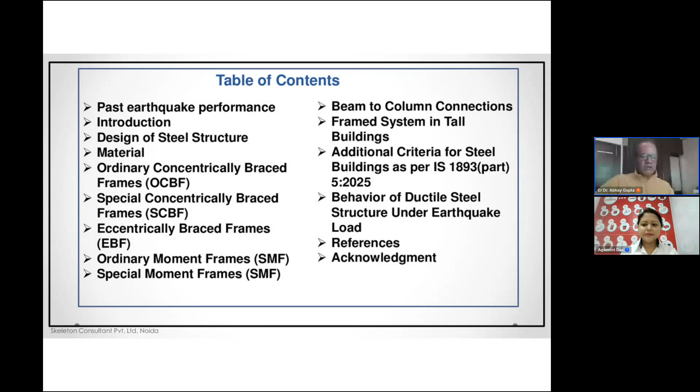This is important. We all know that seismic design means strength, stiffness, ductility, and structural configuration. These are the four virtues of a properly designed seismic structure for proper behavior and performance. I would remind you of a famous dialogue.

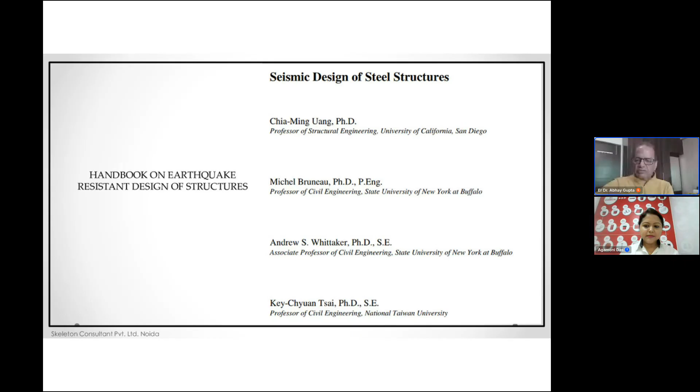This chapter says seismic design of steel building structures has undergone significant changes since the Northridge, California earthquake in 1994. Earthquake is a phenomenon not 100% properly known. So whenever there is an earthquake and damage occurs to buildings and structures, we intend to improve the practice. That is a lesson learned from the failure or lesson learned from the behavior, which is a very good practice for improvement in earthquake resistant design and detailing.

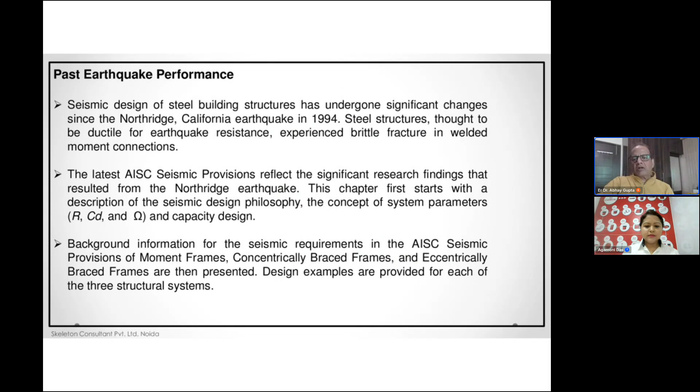So the 1994 Northridge earthquake caused several damages, leading to a lot of changes in philosophy. These are narrated point wise, particularly braced frames moving from concentric to eccentric braced frames. Connection design was earlier thought to be ductile, that steel would not undergo brittle failure, but connections underwent failures. There have been significant changes in the connection design and detailing of steel structures post the Northridge earthquake of 1994.

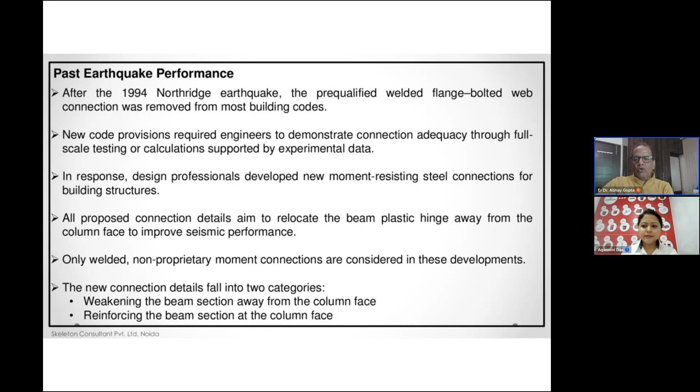In the American code, AISC documents have been published describing new connection details. As stated, the new connection details fall into two categories: weakening the beam section away from the column face so that plastic hinging occurs there, and reinforcing the beam section at the column face so that the connection doesn't fail. These were the fundamental principles.

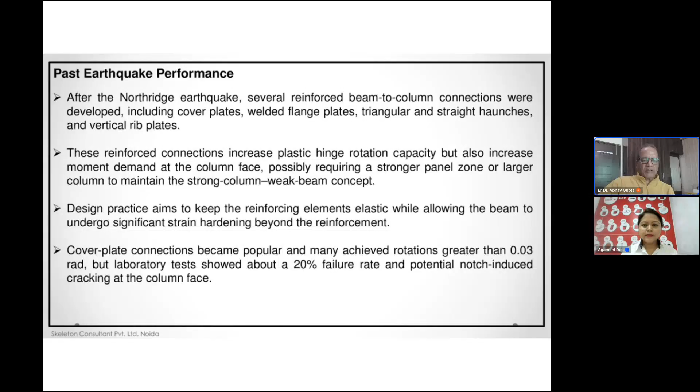Several reinforced beam-column connections were developed, and I'll show you all these details. This is also what IS 18168 emphasizes. Now, this is a summary from past earthquake performance and how things were taken up.

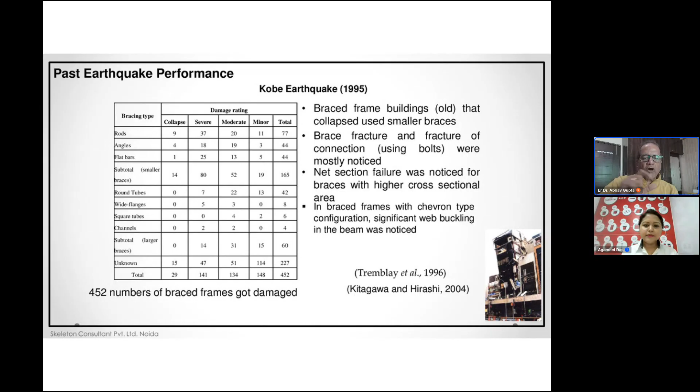These are from the Kobe earthquake of 1995. What damages happened in what kinds of structures? There were bracings of different types: rods, angles, flat bars, and so on. Statistical data was collected on how many structures underwent collapse, severe damage, or moderate damage, and it was observed that small, slender bracings underwent more damage.

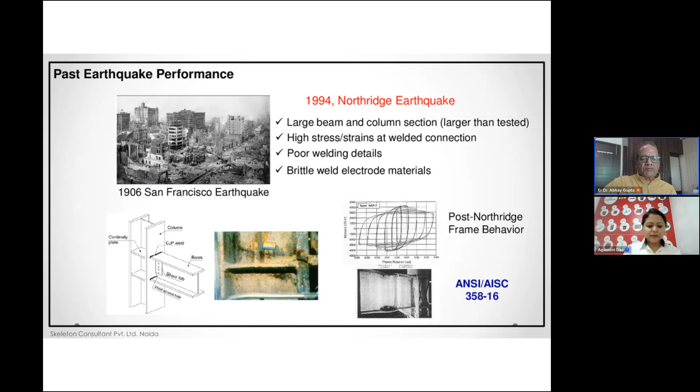These are some images from those damages, picked from literature and from fellow colleagues, covering the San Francisco earthquake, Northridge earthquake, and damage to connections. You can see local failure and local buckling here. Pre-Northridge welded flange and bolted connections were like this, where yielding and failure occurred just at the junction.

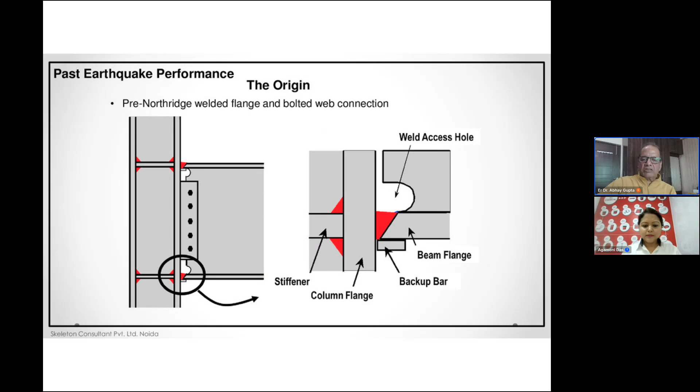Some more of this type: welded flange and bolted web connections, where again damages occurred, and you can see cracking happening there. Though the member itself was safe, connections failed like this. These are some of the sketches.

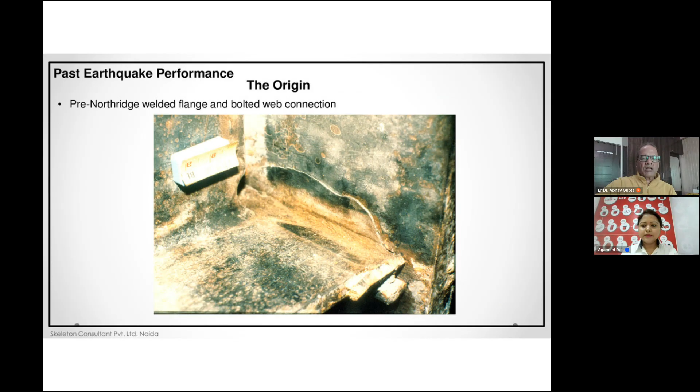These are some actual pictures of the damages in that earthquake. More images and pictures - I'm going a bit fast because these are just historical things, and since you'll receive this presentation, I will ask the Hilti team to share it with all participants. So what was the reason for the failure?

Mostly welding, connection design, and materials were the issues - low fracture toughness in the welded connection, poor quality of workmanship, which certainly is much improved nowadays, and the effect of backing.

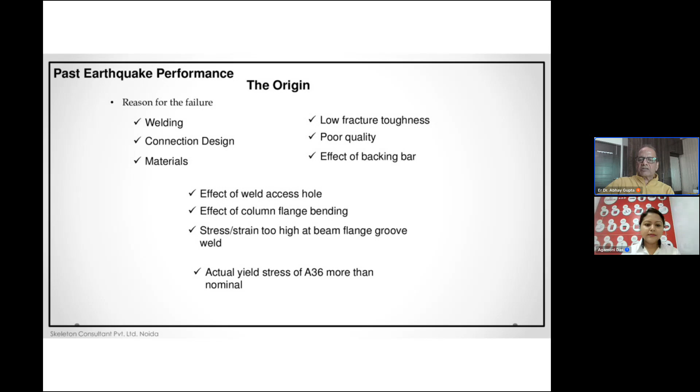Effect of weld access hole - there was a weld access hole typically made so that welding could be done, and that has some adverse effects on the performance of the connections. That is also very, very important.

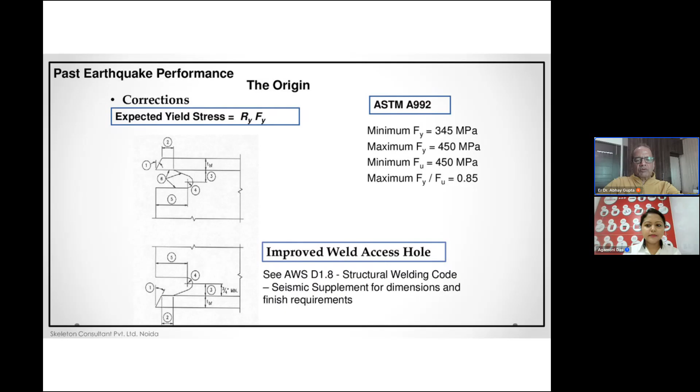Connections as per ASTM A992 specified material strength, and the improved weld access hole was then made. These are some of the improved connections - reduction in the section, development of the improved section, and reinforced, stiffened connections.

This is important - this is the one suggested where the flange is narrowed a bit away from the column face so that plastic hinging occurs there.

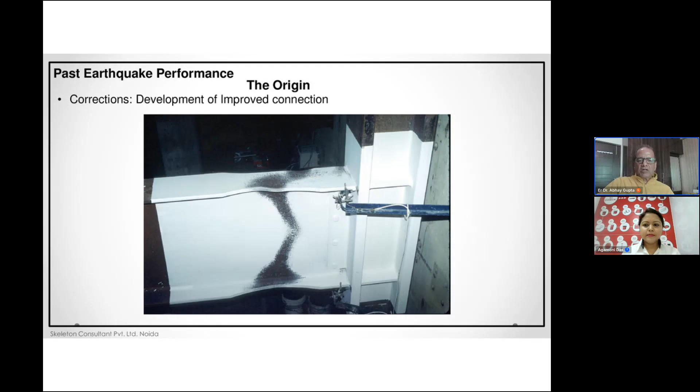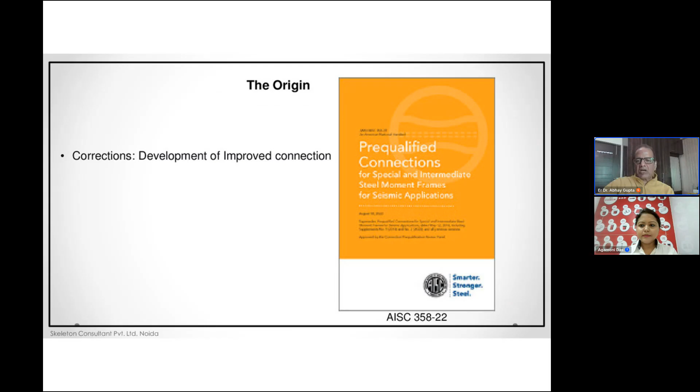This document is very important. Whatever I have spoken is all compiled here in the pre-qualified connections. Pre-qualified means certain qualification parameters for connections were decided, and some connections have been properly detailed and designed, compiled into document 358-22 of AISC. You must all have this document - they're freely downloadable from the AISC site, and we can share them for educational purposes, no issue.

And in Northridge '94, large beam and column sections were there, with high stress-strain at the welded connection which led to poor welded details, and brittle weld electrode material. This was another important parameter - the material of the electrode.

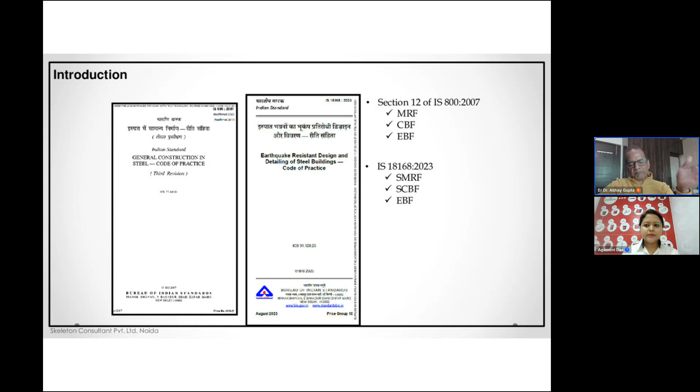So all these have been taken care of in our two new codes, IS 800 and IS 18168. IS 800 chapter 12, section 12 had MRF, CBF and EBF - moment resisting frame, concentric braced frame, and eccentric braced frame - which are converted or advanced into 18168 as special moment resisting frame, special concentric braced frame, and eccentric braced frame. In terms of hierarchy, performance-wise, EBFs are the best, SCBF after that, and SMRF the lowest, in terms of ductility performance of the structure.

In these codes, particularly 18168, these are applicable to all buildings located in seismic zone 3, 4, 5. Now this has to be updated in light of IS 1893 Part 1, the new 2025 version, and Part 5. The zone numbers will change. This 18168 is a bit old, from 2023.

So this will be updated and most probably published as IS 13920 Part 5B. IS 13920 Part 5A would be ductile detailing of RCC structures, whereas this would be Part B for steel buildings. So these code zone numbers would change, meaning in the higher seismic zones, for all buildings this is compulsory - residential, educational and others. Use of this code is optional for design in zone 2, the moderate zone.

In zone 5, only the EBF system. As I said, performance-wise EBFs are better. EBFs are best in energy dissipation - they provide a proper flexible link in the structure, so a sway is there. While concentric braced frames or special concentric braced frames impart strength and stiffness, so they allow lesser lateral sway. So there is a compromise between the two. However, in high earthquake zones, EBFs perform better in terms of energy dissipation.

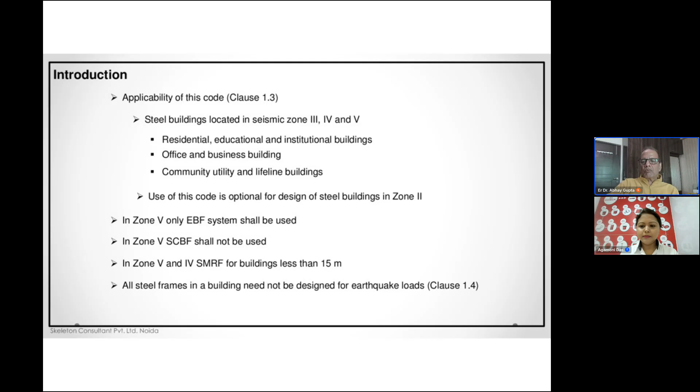Correct, so more qualifying statements are there. The capacity design has been emphasized.

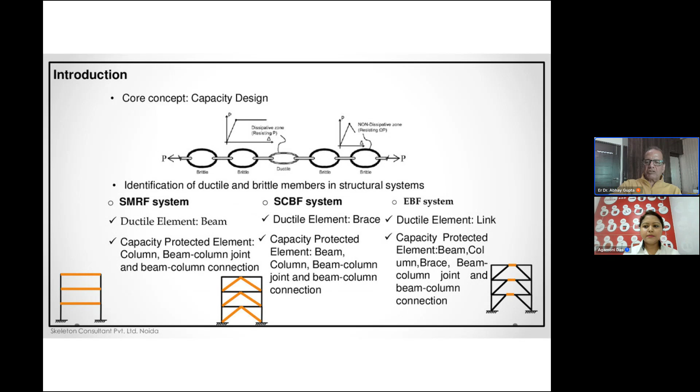This capacity design concept says you should identify ductile and brittle members in a structural system. You need not design the entire structure, every element, for ductility. You can identify which link is allowed to fail, so that the user or agency is aware of where the vulnerability is. So in SMRF systems, which are the ductile elements, and in SCBF and EBF systems, which elements should be protected and which can be allowed to undergo ductility - that is defined based on the capacity concept. This should be understood well and followed.

Many regions of India are prone to strong earthquake shaking. Now it's almost 65-70%, actually 70 plus as per the new map. So we need to take care of proper detailing. The only thing is the last statement, which is important.

Provisions of this standard shall govern when in conflict with those in Section 12 of IS 800:2007, because Section 12 of 800:2007 will still remain there. So the provisions of 18168, or the updated 13920 Part 5B, would govern in case of any conflict between the two. When you go through the course, you must understand these qualifying statements - very important.

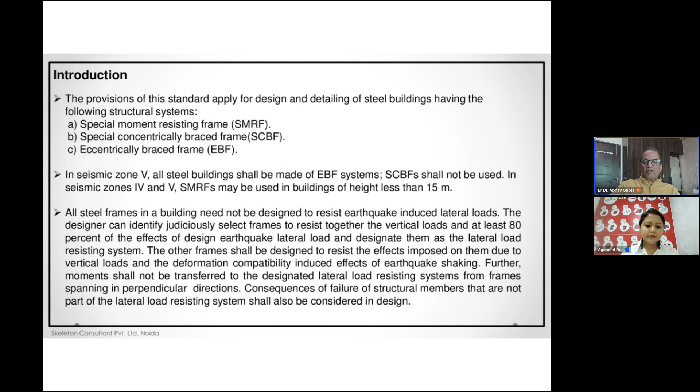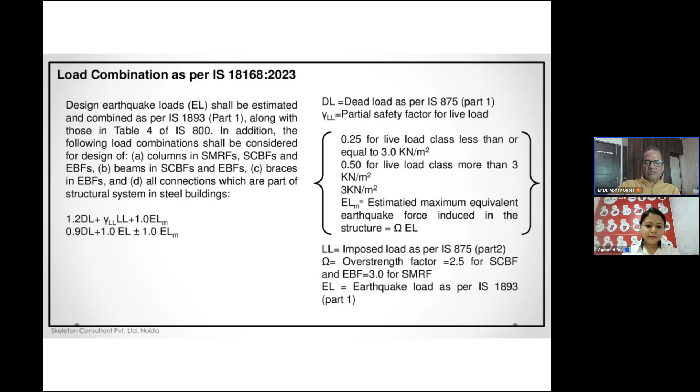Load combinations - there is an additional overstrength factor which has been added, in addition to the partial safety factor for live load, and on the earthquake there is an overstrength factor too. Now overstrength is something beyond your calculated values - there is overstrength available in the structure. Having overstrength is not very good from the perspective of seismic performance, because then the anticipated ductile behavior doesn't reach that particular point. And when you go to the capacity concept, the other elements have to be designed for a larger capacity than that. So the code has incorporated this overstrength factor for different structural systems in the design to be considered.

Load combinations - 18168 says use Table 4 of IS 800. So that has been reproduced here. Simple - in different load combinations, what load factors are to be taken. Same thing, this is also referred from Table 4 of IS 800.

Material strength uncertainty factor - yes, this is given there in the code. Those of you who are aware and have gone through it will be able to answer it very quickly. Please attempt this question.

There are three things in the code which have been emphasized. One is the material and the section. Second is the structural system, which is important. And third is about the connection detail. These are the three important things from the performance perspective.

For material, IS 2062 is the code referred, where structural steel sections and plates of grade E250 to E350 are recommended for use. Any other equivalent grade of steel satisfying the following can be used. There may be a question in mind - what about grade 450? Actually, 450 grade is a high strength grade. It can be used only for those elements which are not supposed to be ductile during earthquake performance.

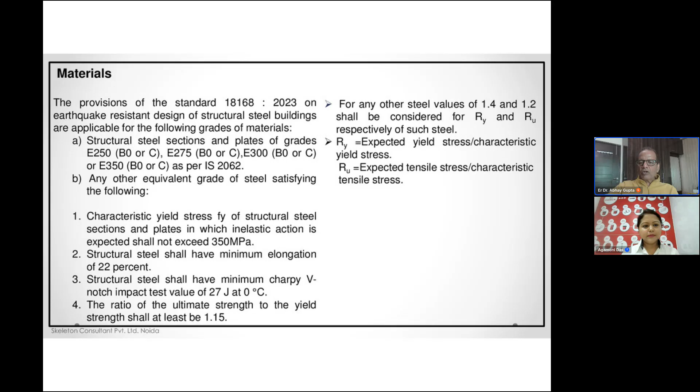You can decide that some of the elements you choose to be ductile. For those elements which will govern the seismic behavior, it is better to use a 350 grade because it is a proper balance between strength, stiffness, and ductility. 450 is for those where strength is important but not ductility, so non-seismic or non-fusing elements can use 450.

This is the material uncertainty factor, material strength uncertainty factor, which is always more than 1.

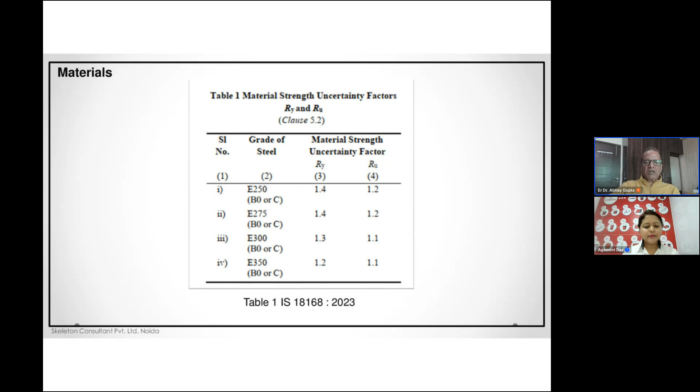Bracing members shall be made of E250B steel from table 2, because they will undergo larger deformations. So it is recommended like that.

Below is given the stress strain curve of 350 and 450, more or less behaving the same, except 450 is a little higher on the stresses side for the same strain.

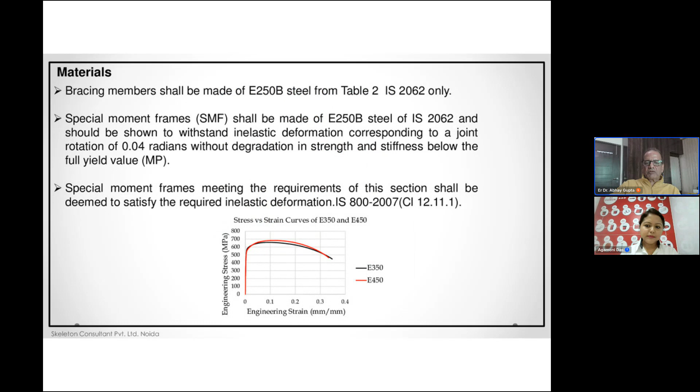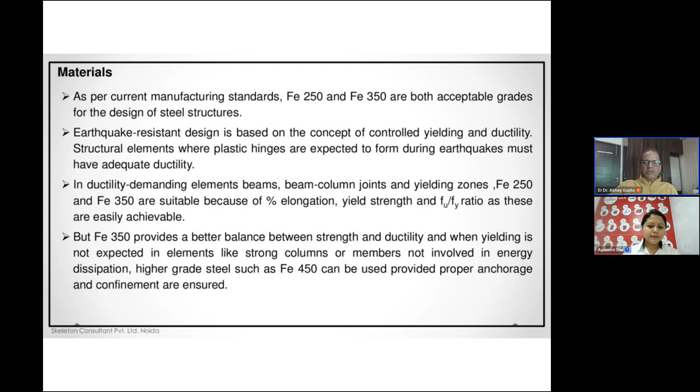As per current manufacturing standard, 250 and 350 both are acceptable, and otherwise some more higher grade steel such as 450 can be used provided proper anchorage and confinement are ensured. In two different cases, using the higher grade and the lower grade, how the structure will behave and how the plastic hinging will be there is shown here.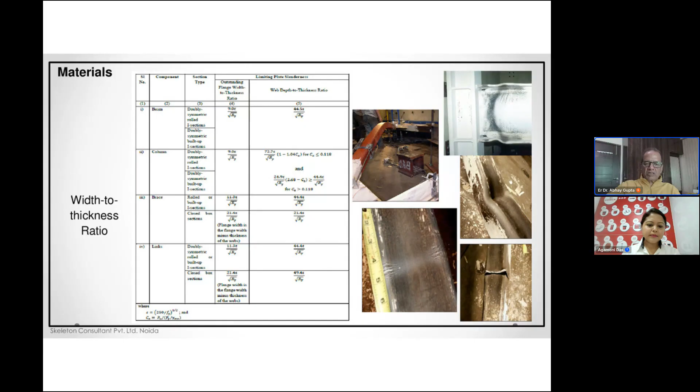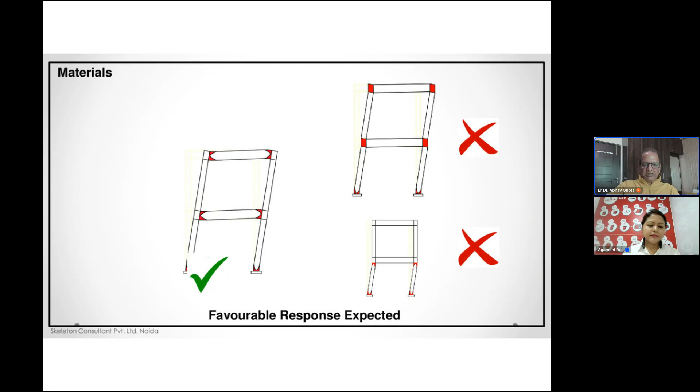Width to thickness ratio for different elements - beam, columns, braces, and links - what should be followed so that you do not get these kinds of issues, are given here in this table. I'm not going into those details. The desirable and undesirable performance, where the plastic hinging should happen and where it should be avoided, is shown here.

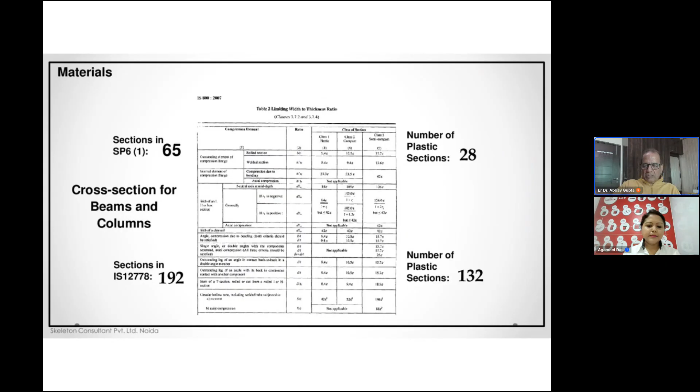There are two documents: one is SP6 part 1 and one is IS 12778, where steel sections are given. There are 65 sections in SP6, whereas 192 in 12778, out of which 28 plastic sections are there in SP6 part 1 and 132 in this one. So this is just a statistical analysis of the data.

Eccentricities less than the beam depth are permitted if the resulting member and connection forces are addressed in the design as per clause 12.2.1.

If you look at this clause, some protected members are shown, that the required strength of capacity protected elements like columns, beams, struts, collectors, and connections shall be taken as the larger force determined from the following analysis. These protected zones I'll show you in a diagram a bit later on.

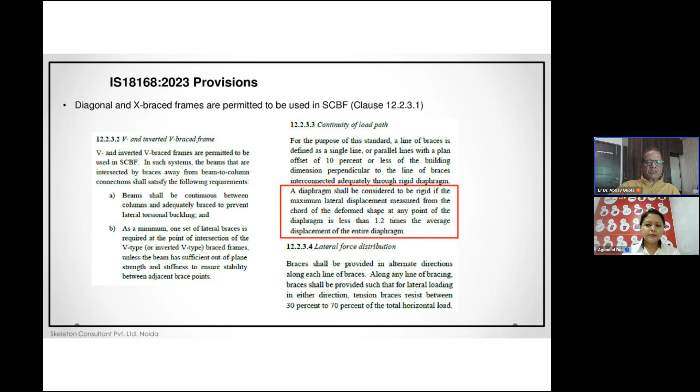A rigid diaphragm shall be considered rigid if the maximum lateral displacement measured from the chord of the deformed shape - it is just the lateral movement. So how that will be considered as rigid, you have to take care of, and then you follow this.

K-braced frames shall not be used in SCBF, special concentric braced frames. You can only use the diagonal, the cross, and the V configurations.

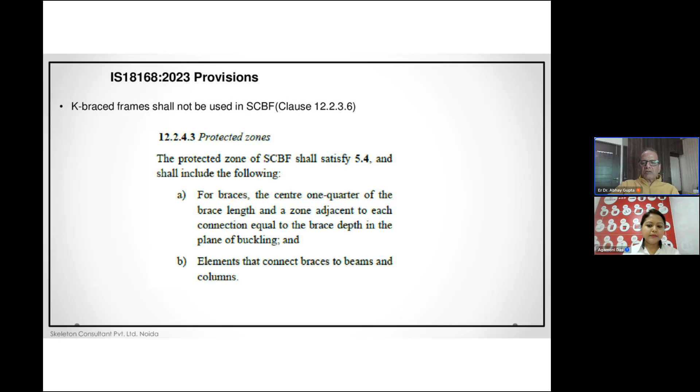The protected zone shall satisfy clause 5.4 like this. For the braces, the center one-fourth of the brace length has provisions about where it should be and where it should not, which zone should be protected.

Links shall not be connected to the columns. This focuses on ensuring performance during severe earthquake shaking - this is a good question. So there are certain requirements laid down in IS 18168 for different kinds of sections for the performance.

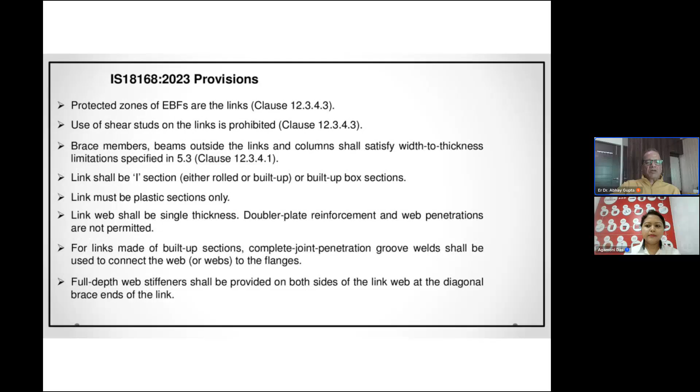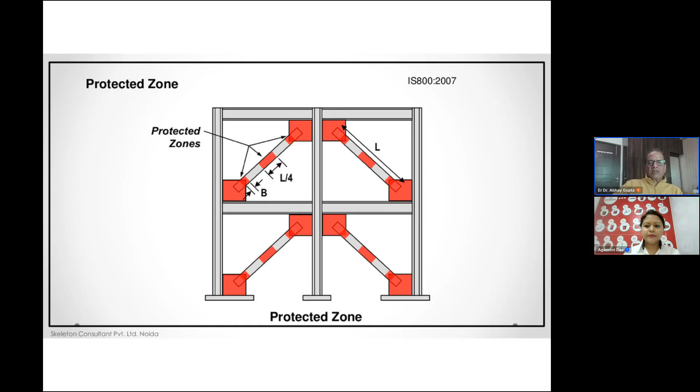All these protected zones of EBFs are the links - they should be protected. Use of shear studs on the link is prohibited. Brace members and beams outside the links and columns shall satisfy width to thickness criteria, so these should be followed. These are the protected zones which should follow those criteria - they should not yield or fail. That is the protected zone specified.

Some more provisions going ahead - this is very nicely narrated in IS 18168, and going through that, if you make your checklist, life will become very easy as far as steel design and detailing is concerned.

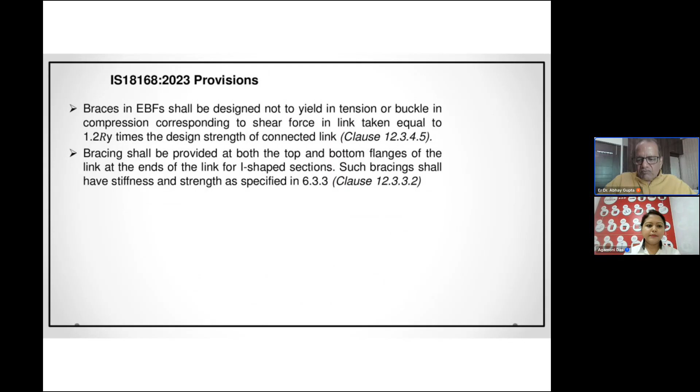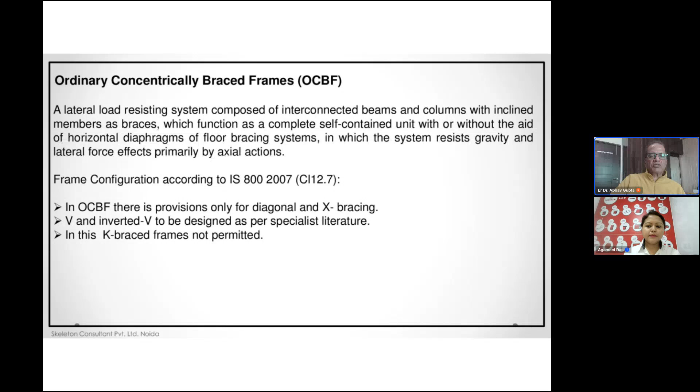Some of the bracing systems using OCBF are there, with actual images showing how they look and how they are done, and design of bracing members as per IS 800 Clause 12.7.2 are given.

The slenderness ratio and rotation along any line of bracing - braces shall be provided such that for lateral loading in either direction, the tension braces will have to resist between 30 to 70% of the total lateral load, not beyond that.

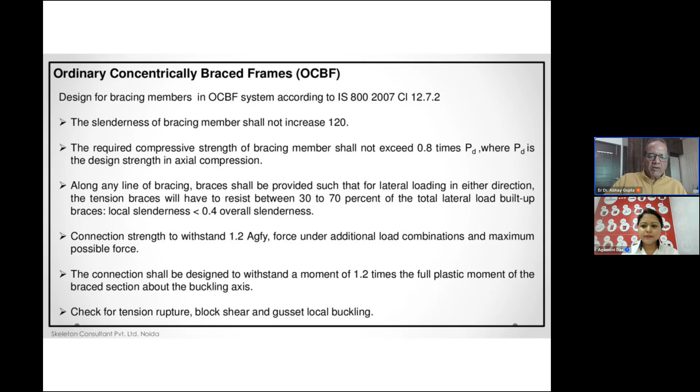So these are the points which should be taken care of, and IS 1893 has picked this up from past experiences and done it very nicely.

In buildings like Hancock Center, Chicago, or some warehouses, concentric braced frames can be approximately modeled as vertical trusses. You can always do that and analyze them.

Like this tower also. Initially, braced frames were used for their high strength and stiffness. These OCBFs are high strength, high stiffness elements.

Seismic provisions were introduced late in the USA. In India, now we are picking up and emphasizing on them.

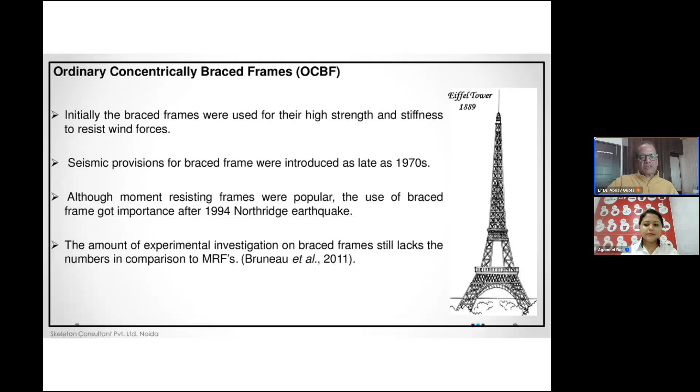Although moment resisting frames were popular, the use of braced frames got importance after '94. Till then, they were thinking moment resisting frames are good, and most buildings were like that, but they suffered severe damages. So then they switched over to braced systems.

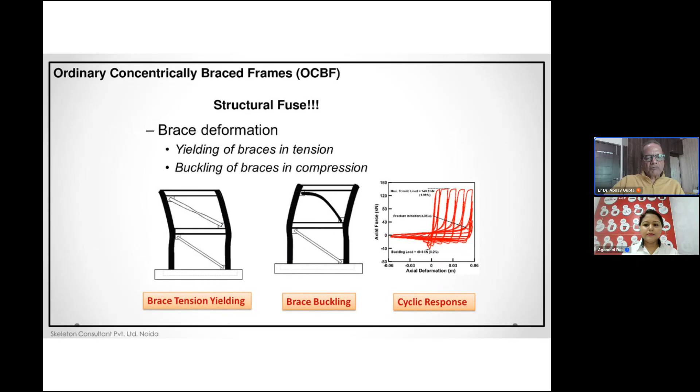Brace deformation, brace tension yielding, buckling would look like this, and then the cyclic response would come this way - not very good from the earthquake point of view.

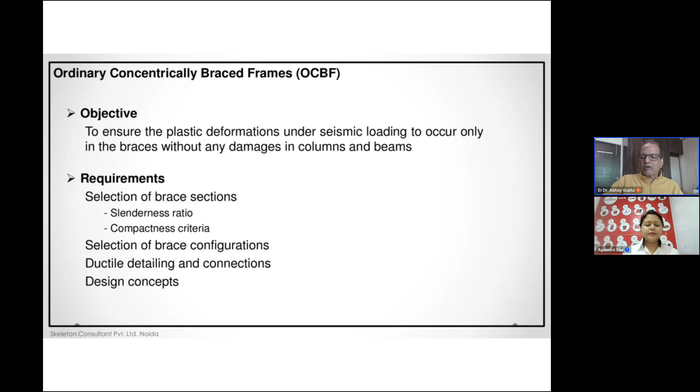The brace section should be selected based on slenderness criteria and compactness criteria. So more such things are there. Actually, it's a very exhaustive document with many things - if you see, there are 186 slides.

I hope time is not that much, but certainly we can have sessions specifically dedicated to smaller segments out of this, like a session on the structural system only, and similar topics.

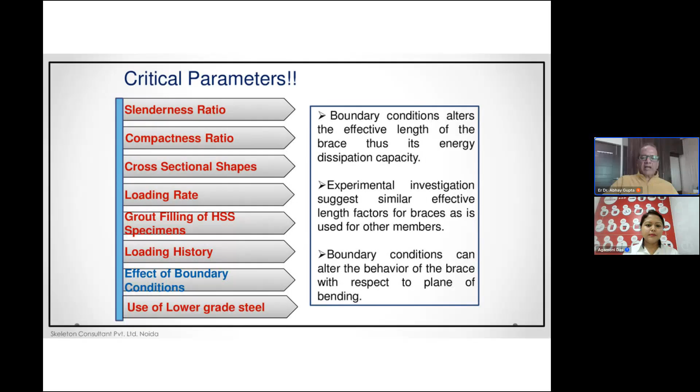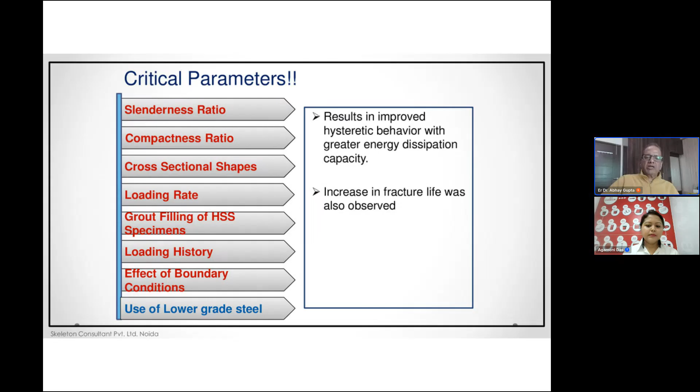These are some of the critical parameters on OCBFs listed here, which IIT Professor P.C. Ashwini Kumar has very nicely dealt with. There is a very good video of Professor P.C. Ashwini Kumar on YouTube which you can all refer to, where things have been explained in detail. So that would also form a good reference, friends.

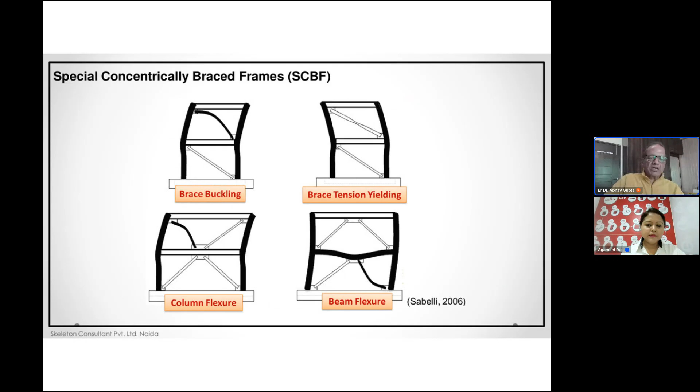I'll just skip a few things about the balance design procedure. Then special concentric braced frames are there, which are to be detailed such that we get the desired behavior - ductility, shifting from strength and stiffness to the lateral side, to ductility. That is the SCBF arrangement.

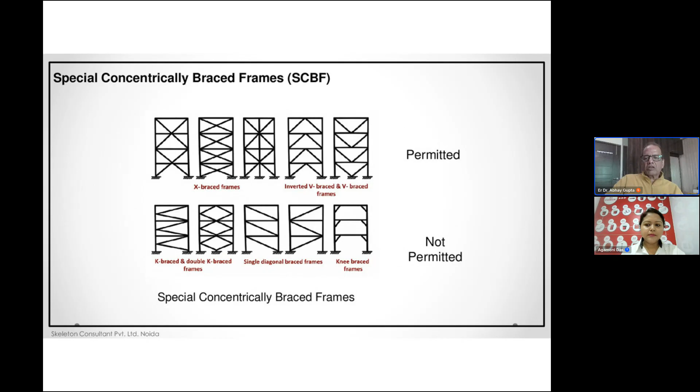What configurations are permitted with SCBF and what are not are shown here. Design guidelines are there for SCBFs.

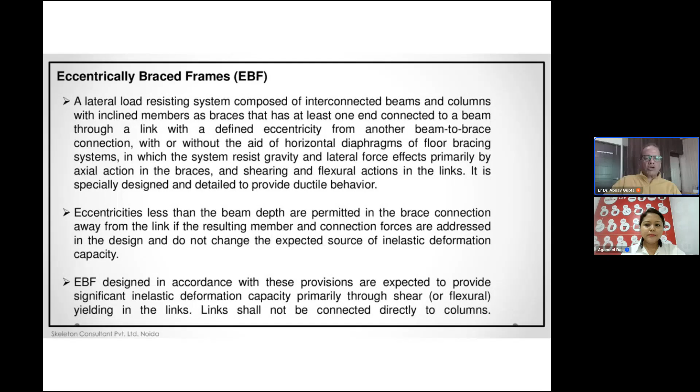Then this is very important - eccentrically braced frames, wherein we do not connect the bracing member to the corners, but to a member with some eccentricity, and there is a shear link which is connected. This shear link helps a lot in seismic energy dissipation.

As of now, this is one of the most advanced areas, but there is one more beyond that, which I'll show you, which is yet to be in the code. Professor D.R. Sahoo from IIT Delhi has done very good research on that, published. Fortunately, I have been interacting with him, and I'll show you some of the things beyond EBFs that are also there.

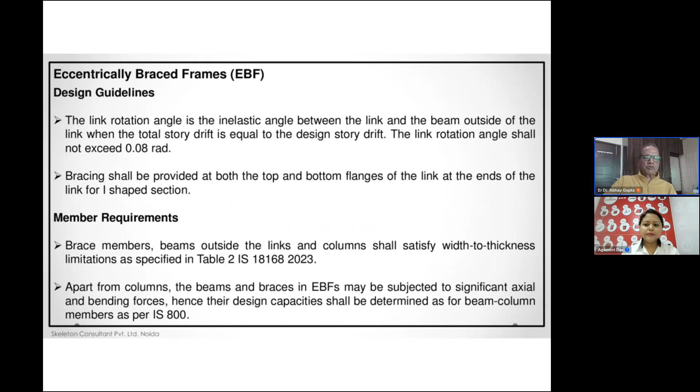But as of now, IS 1893 emphasizes use of EBFs in higher seismic zones. EBFs, though they involve a little more complex analysis compared to SCBF, perform better. One requirement is that they should be laterally stiffened.

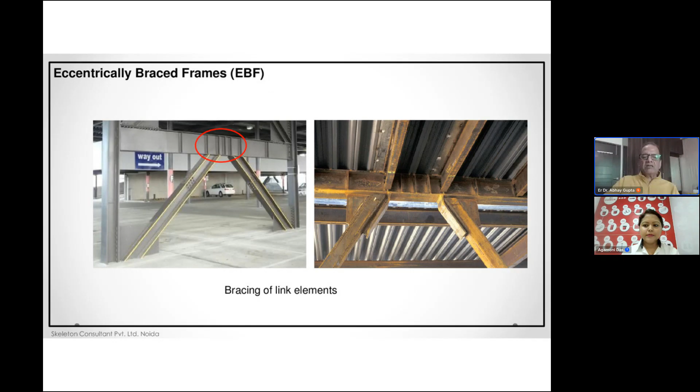Any member within the EBF should be laterally stiffened so that there is no sideways or lateral movement of the element. And the link rotation angle - how much that should be - is important.

All these things we need to take care of in the analysis, and then it performs very nicely under seismic effects. The requirements are like this - you can see the mechanism, link to beam connection and link to column connection, which is not the recommended one.

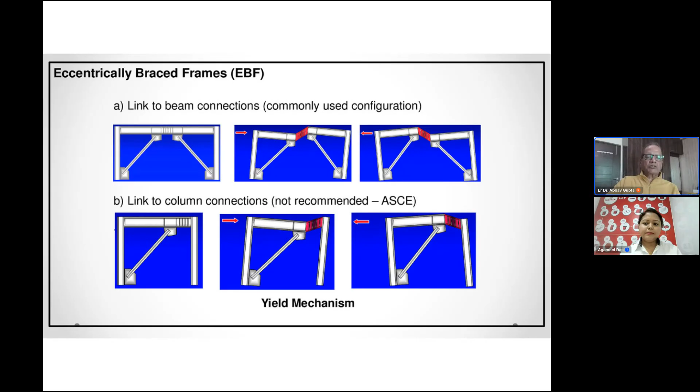The link to beam connection is the more recommended one, which should be followed like this.

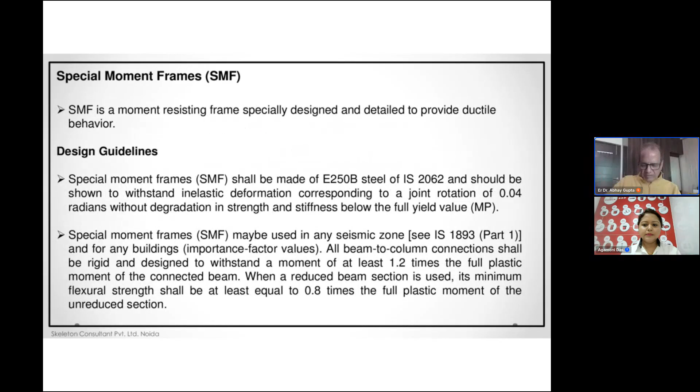Ordinary moment frames and special moment frames, in some cases we have to use them without bracing, so moment connections are there, and there are provisions with the doubler plate and the continuity plates.

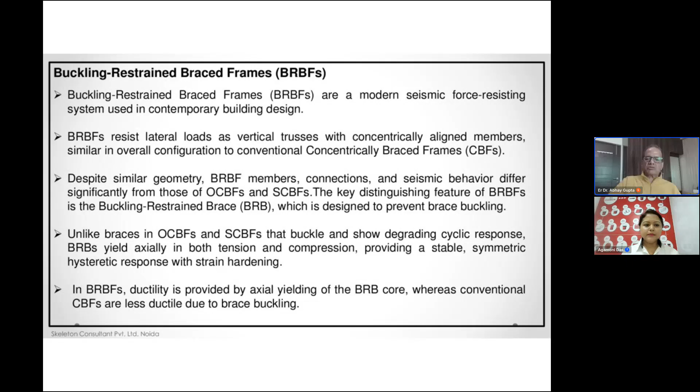This is the new latest development, BRBFs, buckling restrained bracings. Buckling restrained braces are very good as far as strength and stiffness are concerned, and as far as energy dissipation is concerned. This is a new area where more work is being done, and soon they'll be implemented. They look like this.

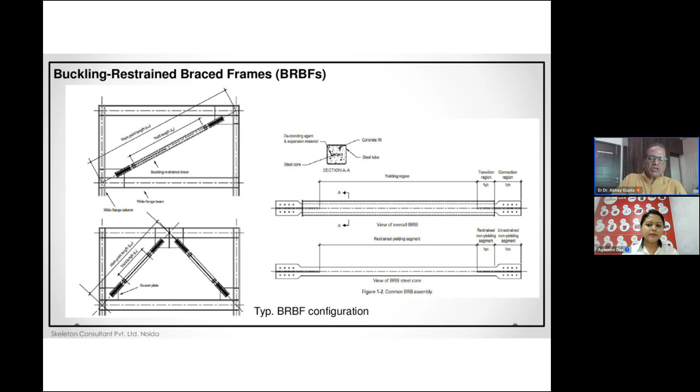Connections are most important, because it is said that the connection should not fail. Our members are designed for the capacity, and the connection should be designed for the entire capacity of the members which are connected there, correct? So these connections are very important.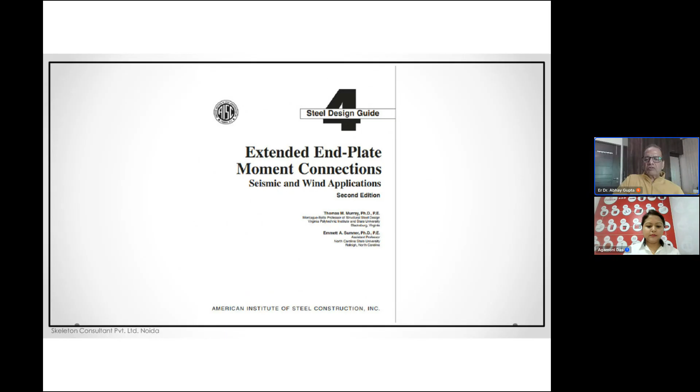Therefore, documents like extended end plate moment connection and pre-qualified connection for seismic performance are very important. Our code doesn't say much on these things, however provisions and details from these documents help a lot, and we should prefer them. Some of the points I have taken from AISC.

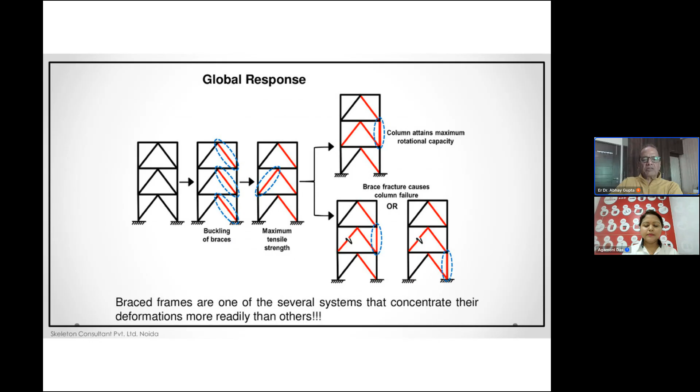The global response behavior expected should be like this: in a frame, the buckling of braces reaches maximum tensile strength on one side, and the column attains maximum rotational capacity on the other, so that columns do not fail or yield. This is the desired global behavior.

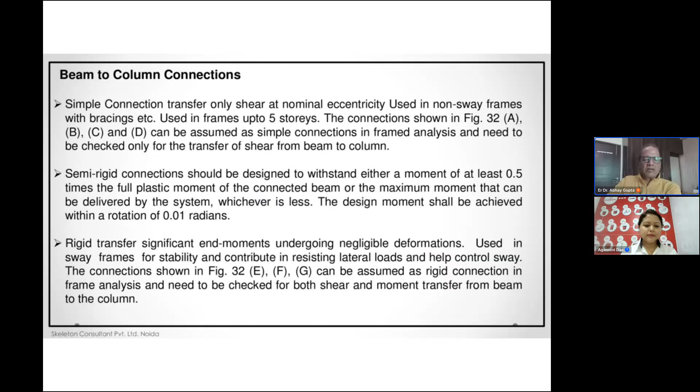On the beam to column connection, up to 5-story buildings, simple connections are allowed. However, as you go higher, semi-rigid connections and then rigid moment connections are used.

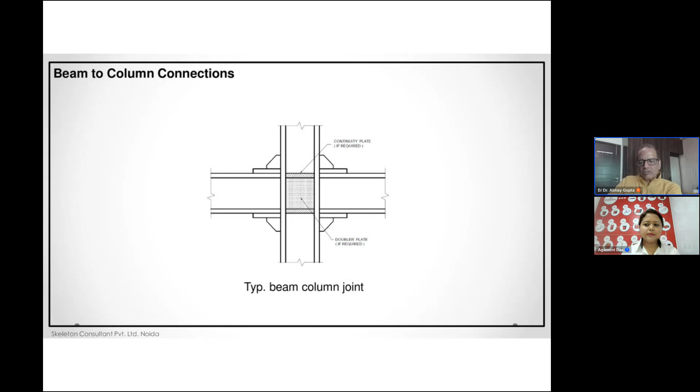A typical beam column joint has a doubler plate or continuity plate depending on the design, forces, height of the building and earthquake zone, whether it is required or not.

End plate connections with and without stiffeners are also in use. Beam to column connections come in varieties - only the bolted connection, or bolted connection with a stiffener. Both types are there.

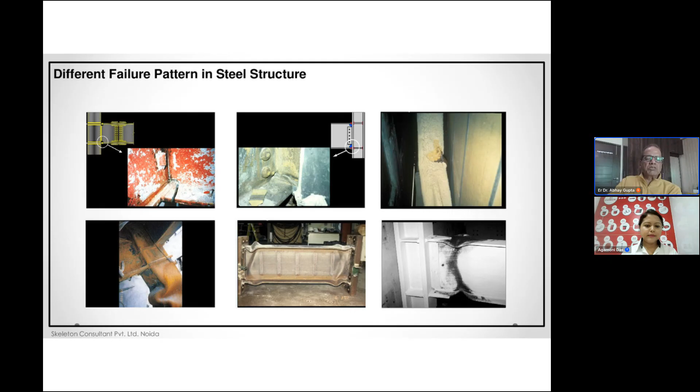Some of the failures, some performance images when the earthquake comes on these kinds of connections, are there.

That is very important - designed to yield through a plastic mechanism and dissipate seismic energy. Controlled damage, no collapse, large deformations are acceptable. Damage is gradual and visible, giving warning and evacuation time. That is the advantage of steel.

Seismic energy is dissipated through stable yielding and plastic hinges. Forces are capped after yielding, preventing force escalation - it only flows then. Plastic mechanisms act like fuses, protecting brittle components.

This is very important, and we use this in RCC also to some extent. Load redistributes after yielding, improving overall robustness. Indeterminacy plays a role - structural redundancy increases, enhancing global stability. This is very important: damage occurs where intended.

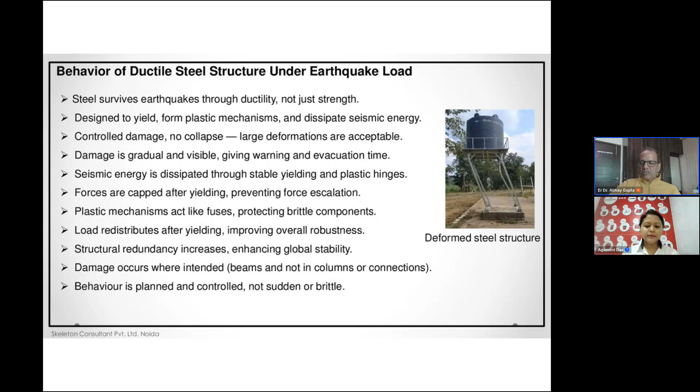We should govern the performance - that is performance based design. Behavior is planned and controlled, not sudden or brittle. These are the important things as far as performance is concerned.

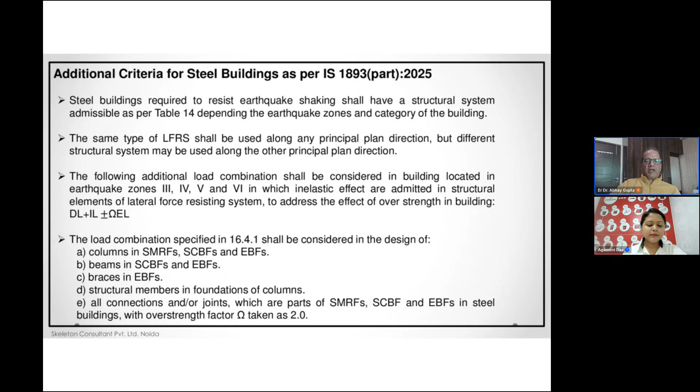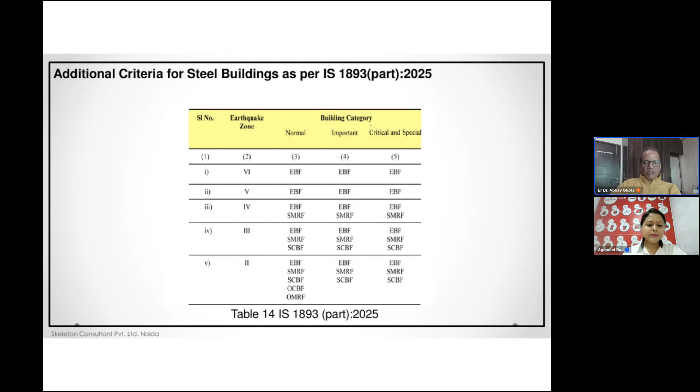Now our codes, IS 800 as well as 1893, mention some new things. This is IS 16700 - they speak about the structural system, the frame system in tall buildings. Additional criteria is given in 1893 Part 1, and more or less some of the things, but which structural system to use in which zone is given in 1893, the latest one, 2025.

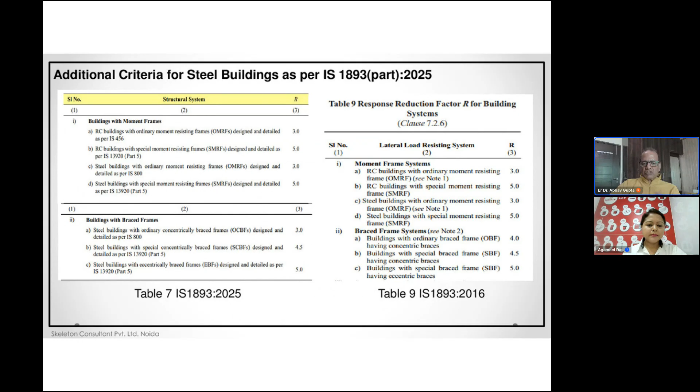And then additional criteria with regard to the response reduction factor for different systems - we have to adopt this about steel buildings. For residential buildings you can use this, and for higher zone buildings you have to use this kind of analysis. That is important.

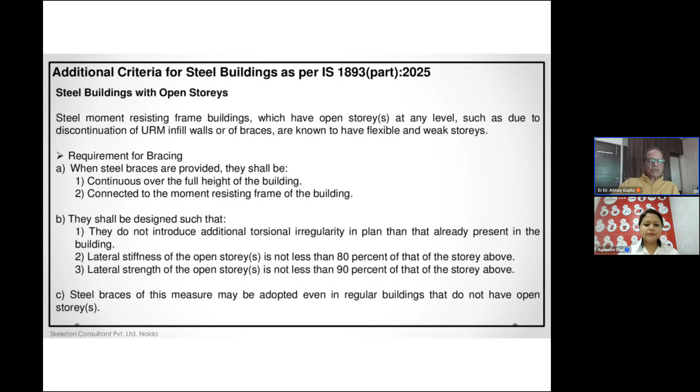Steel buildings with open stories need to have bracings behaving like shear walls, continuing from bottom to top - you cannot discontinue them at the lower level. Stiffness of the lower stories is also important. These are the provisions in 1893 Part 1 and 2.

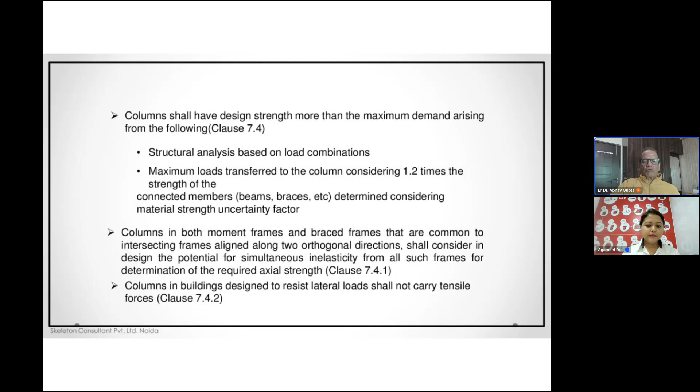So I have just taken you through the important aspects from each of the codes. However, there is a long list of references, which is IS 800:2025.

Yeah, this is a good question. And I think with the discussions, with whatever I have informed you, you will be able to answer that survey.

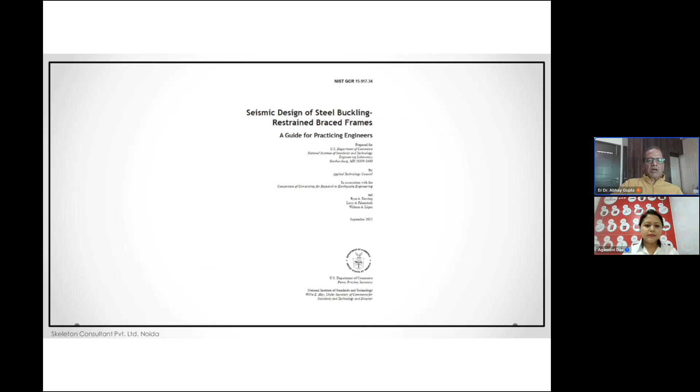So first are the Indian codes up to IS 2062, and then there are AISC documents plus the handbook on seismic design, which will provide you a good insight into the phenomena, the performance, and then some design guides. These are the cover pages of all those documents, just for reference.

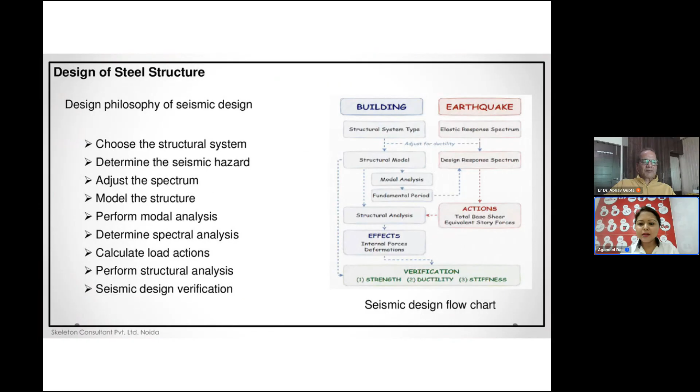The question came from Mr. Dixit Patil: If EBF systems are better than SCBF, then why is the overstrength factor for EBF system higher than SCBF as per IS 18168? Actually, your question has the answer. If a system is better, it is able to resist more forces. Overstrength factor is not a safety margin; actually, overstrength factor accounts for the higher capacity of the system. Even if I ask you a simple question, please calculate the load carrying capacity - how much single point load an RCC beam of 300 by 300 millimeter size, reinforced with such and such reinforcement, can carry - with all the factors you have, you will calculate the value of that load P as PL by 4, equate it, and get the value of P. But in that you are not accounting for the fact that when I design M25 concrete, I am using only a part of that capacity, I am getting much more strength. When I use Fe415 strength steel, actual UTS is much higher. So that overstrength actually gives me a number which is the higher capacity of the section. When the capacity is higher, capacity design concept says I need to design my other components, the connections, etc., for that. Otherwise, my structure will not go into the plastic range if I have not taken care of that - it will not go there. So for a better system, overstrength will be a higher overstrength factor. I hope I am able to answer.